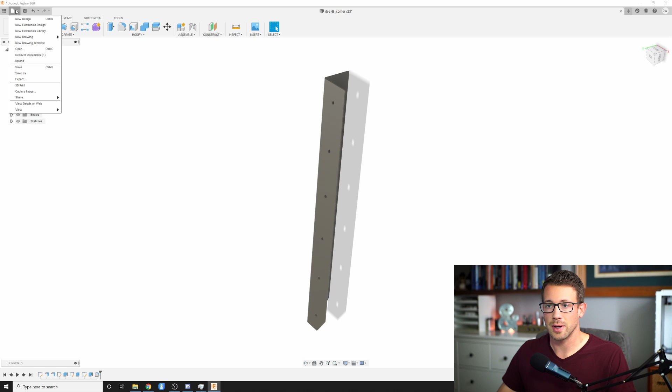Step number one is you need to create a flat pattern—see said video. After that flat pattern is created, we need to go to File, go down to New Drawing, select From Design, and under the representation within this drawing menu, we are going to select Flat Pattern. We're going to create a new drawing from a scratch template.

There are some ASME and ISO standard templates that are really good. I just use ASME in inches, and then I always change my sheet size to 8.5 by 11 or 11 by 8.5. That's just because it's the only size of paper I have access to here, and I know it's scalable, but I just like to do it this way. So I'm going to hit OK.

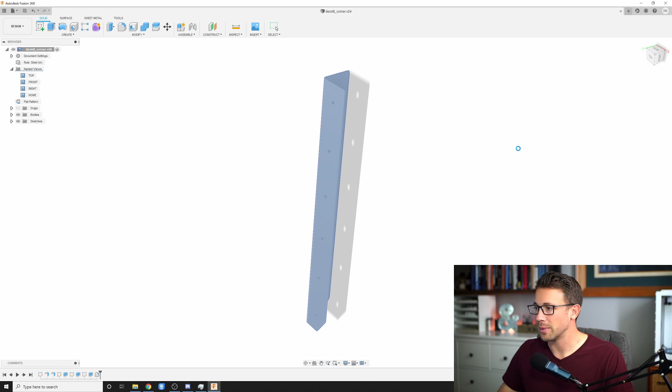That is going to give me my drawing, and you'll see that it already has populated a base view for me. Now we can change the orientation of that view to the right or the left or the top. None of those give us a whole lot of information.

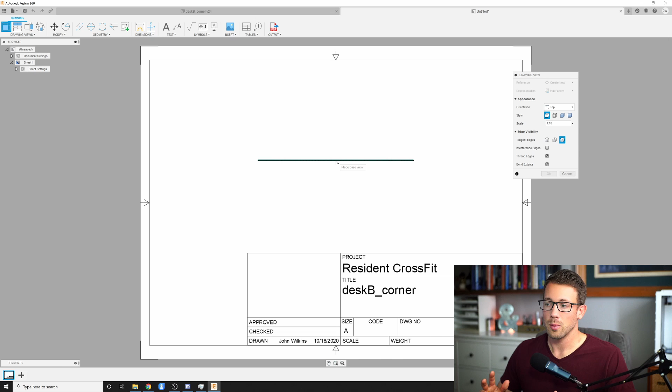So the thing we want to focus on here is we need to give the people who are going to be cutting and forming this object, one, some overall dimensions for the part so that when they go to cut it, they know they're not cutting something wrong. So we need to give them the face-down view of that, and for that, that is our front view. This is what we want to show them and actually put some overall dimensions on it.

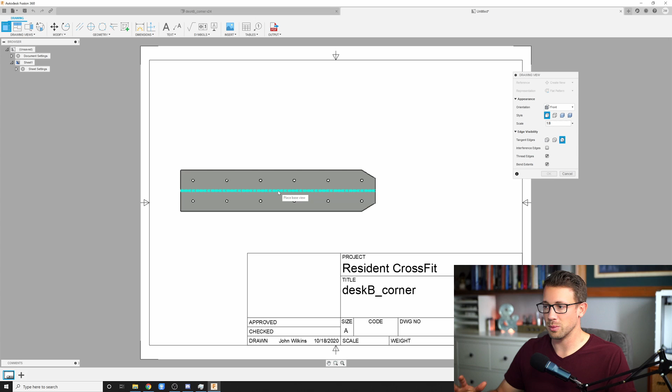The other thing we want to show them is a form dimension or a bend dimension—where is that bend and what radius does it need to be bent at? So we obviously need this view to do that as well. So I am going to change the scale of this to 1:8 just to give it a little bit more space occupied on the screen.

I'm going to go ahead and click to place it and hit OK. Now it's going to give me my nice line art drawing here, and you'll see that it gave us, with those settings we had, a bend line right here.

One of the other things I like to do when giving a drawing to a shop is give them something that shows the final product. I usually put that in the upper right corner so they can see what it's supposed to look like when they're done. So in this drawing file, we need to create a new base view based on our folded model, not our flat model. We go to base view up in the top left, which pops up a new drawing view.

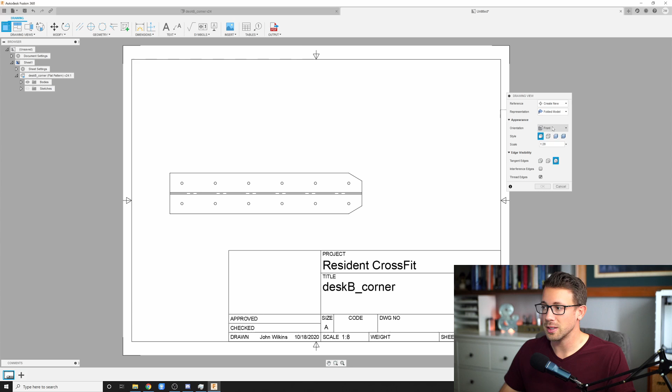You'll see it's giving us what's referred to as the front orientation based on our design. That's not going to tell us much, so we need to change the orientation to an isometric view. I'm going to go ahead and select Southwest Isometric.

It's not always the case that it will give you something that looks good. What I mean is this Southwest Isometric view isn't that great of a representation. Neither is Southeast - they just look weird. Northeast looks weird too. This one is probably the best, in my opinion. Northwest, also not that good. I'm going to go ahead and say Northeast Isometric.

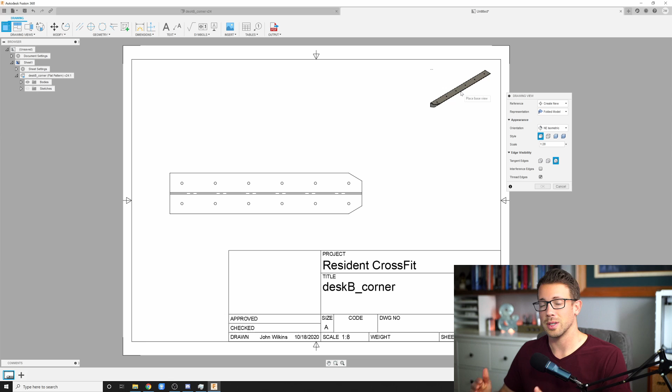We'll be covering in another video how to create a new drawing view so you can get something that actually looks decent. But for today's purposes, I think this will be just fine.

The scale, again, you can change this to whatever you want. If you want it bigger, go ahead, but I usually like to make it a little smaller, so 1:20 or maybe 1:16 looks good. I'm going to click, that places it there, and I'll hit OK.

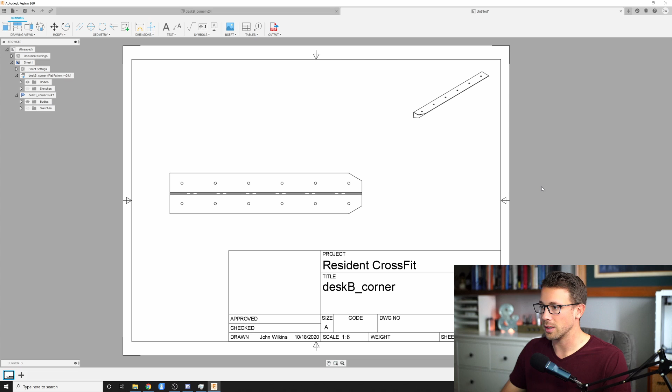And now that at least gives some kind of reference to the shop - okay, we've got a bend right here, and this is what the final part is supposed to look like.

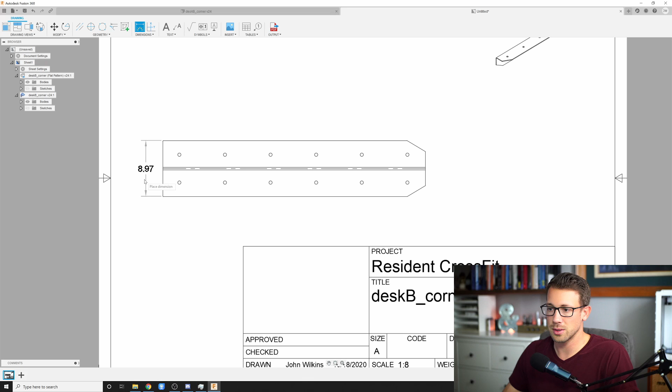Now we need to place some overall dimensions for this part. For that, I'm going to go to dimensions up here. I'll click my linear dimension, and select these two edges, and select these two right here.

So this is just a couple of overall dimensions telling the fabrication shop that this part is roughly 9 inches by 43 3/4 inches. So if the scaling of our DXF is off, which it shouldn't be if you follow the last video, but if it is by any chance, this tells them something's wrong, and we need to ask whoever designed it to redo it for us.

So now we've got our overall dimensions. The next thing we need to place is going to be a bend dimension.

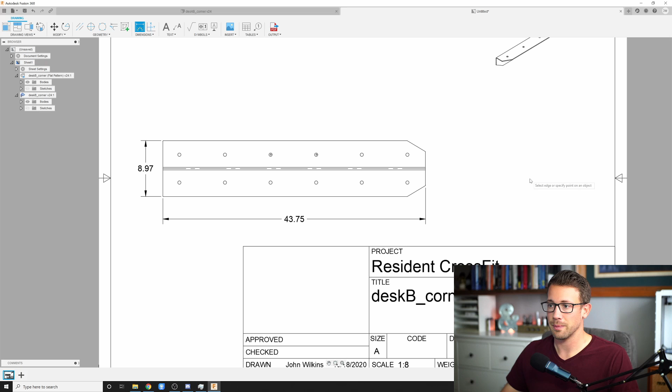In order to do that, I just like to go to the bend line and reference from one side right there. You can see that this is about 4.5 inches, or roughly halfway on this part. Let's give ourselves a little bit of room here, and a little bit of room here.

All right, now we've got the 3 primary dimensions that we need. They don't need to know how big all those little circles are, because our DXF is going to tell the laser exactly the size of all that.

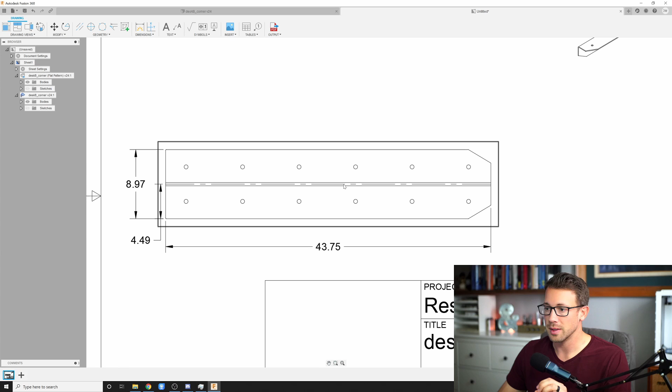Now, the last little piece I like to put on here is I like to actually reference this bend so they know exactly what radius and which bend we're talking about, especially on drawings that have multiple bends.

So in order to do that, we are going to go to Tables, Bend Identifier under the Tables menu, and we're going to click that. And we're just going to select our bend center line. It's even telling us in the note right there, select bend center line. I'm going to click on that, and it gives us a little 1 right here.

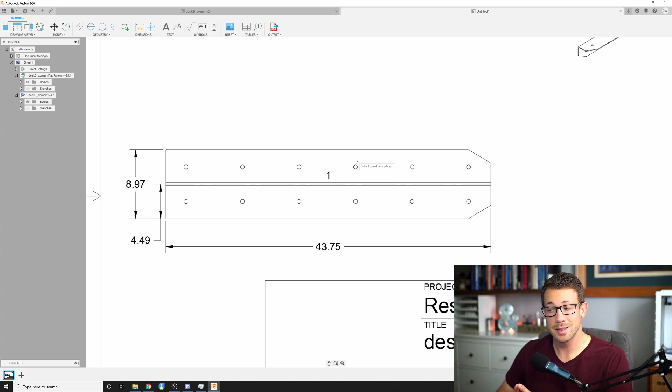Now this is important, especially on drawings with multiple bends, because it's going to label all of those, and then we're going to put in a table that shows what those bends are. Now to do that, we're going to go to Tables, and we are going to say Table.

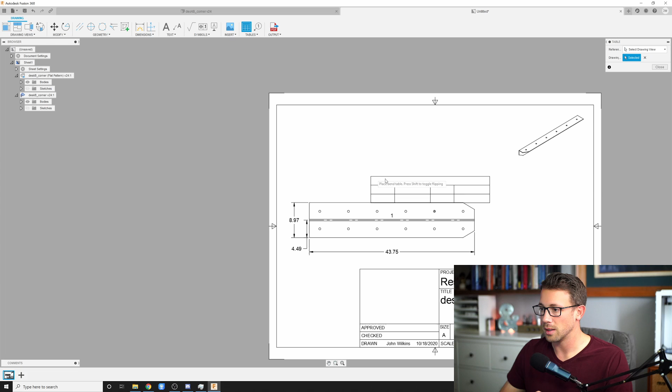And we selected our drawing view. That was a little weird, but anyways, we clicked on our parent view, just in case you missed that—it was a little quick. And then we're going to click to set our table. So it's automatically creating this bend table for us, which, as you can see, with multiple bends, is a really nice little feature.

So what this is doing is telling the shop: here's the bend ID, number 1 right here. The direction of the bend is down. This is important because with a flat view, some bends are going to be down and some are going to be up. And it tells them what angle to bend it at—so if it's not a perfect 90, if it's 30 degrees or 45 degrees, it's going to tell them exactly what that angle is, and then the radius it should be bent at, which in this case is the same as the thickness of the material.

It's about 3/16, .1875. All right, so the last little piece is I'm going to go ahead and move this table a little bit so it's out of our way. The last pieces we need to tell them are: what do you need to do with this part, how thick is the part, and what kind of material is it?

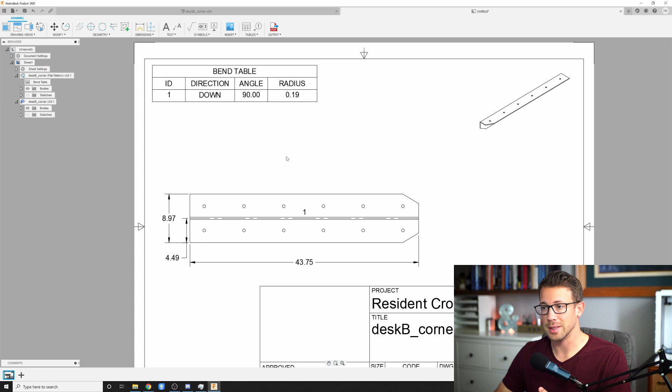In order to do that, I'm just going to place some text, specify the first corner, drag out my little text box, and just type some notes. Number 1, cut and form. So I'm telling the shop that they need to cut it first, and then they need to form it. I'm expecting a complete cut and form part.

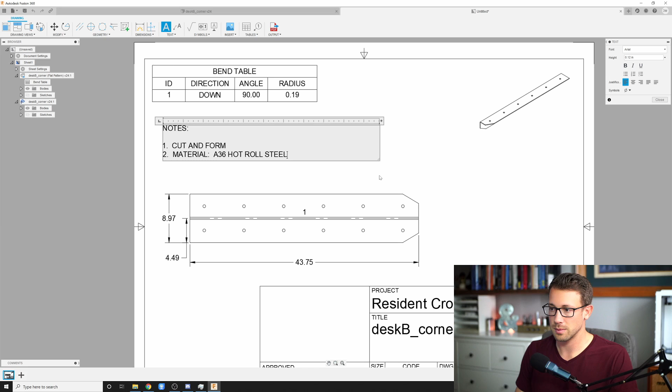Number 2, I'm going to tell them the material type, which for this is going to be A36 hot roll steel. And then for number 3, thickness is going to be 3/16. And that's all we need to tell them.

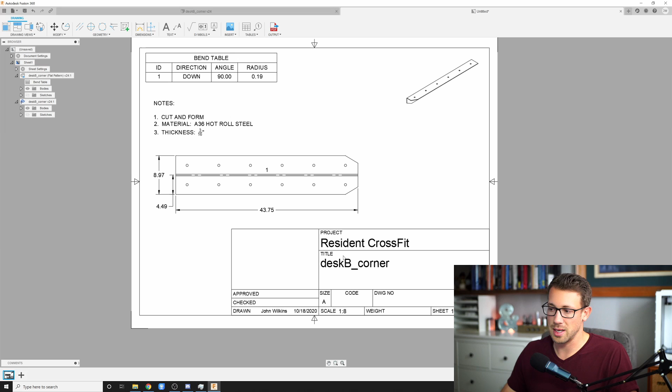Now this drawing—you can put in your other stuff here, drawing number, we've got the scale. The scale was automatically populated, by the way, based on our parent view placement. But you can populate a drawing number, your name, date, title, project, all that kind of stuff if you want to. But this drawing now contains all of the information for this particular sheet metal part that a shop is going to need in order to create it for me. And you can create a PDF output if you want, but otherwise, this thing is pretty much complete.